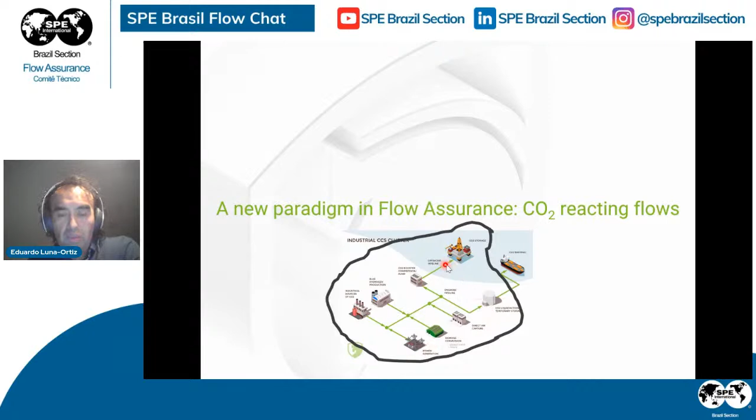And now to the topic. I have two particular topics. The first is CO2 as reacting flows. I'm going to talk about this part, which is when you transport or gather CO2 captured from various industrial sources, or from stripping CO2 from natural gas. That CO2 is gathered into gathering systems via pipelines, then sent to, for example, offshore sequestration, but also can be onshore. I'll talk a bit about this section with the pipelines.

Because there are many sources, we essentially won't just have CO2 - it's never going to be pure, so it will have a number of impurities, and it can literally be anything. Of course it can be water, a product of combustion. It can be hydrogen or nitrogen. It can be hydrocarbons, NOx, SOx, or anything. It's unbelievable the amount of stuff that can be there.

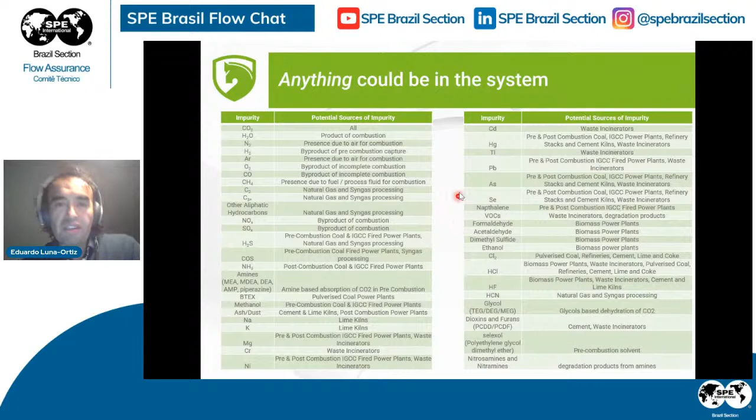And we know that even impurities at the ppm level - parts per million mole per mole - can change quite a lot the physical behavior of pure CO2. For example, here I have two figures from this reference. To the left, I have a fluid with CO2 with some impurities, including about 2.5 parts per million of glycol. This glycol induces liquid dropout at these pressures and temperatures, which are normally the operating pressures and temperatures of transport systems. If we have the same cocktail without the glycol, suddenly we don't have this liquid dropout - or we have it but at much lower temperatures. This is just due to having very little glycol in the system.

On the other hand, if we have 2% hydrogen, or 2% of other non-condensable impurities, this will enlarge the phase envelope, depending on the impurity of course. The problem is that if you want to operate within your pressure and temperature operating region, you might have to operate at higher pressures depending on the amount of, for example, hydrogen. So it's important to know it's not just pure CO2 that you have - you have various impurities, and every impurity or combination of impurities causes different behavior in the pure CO2.

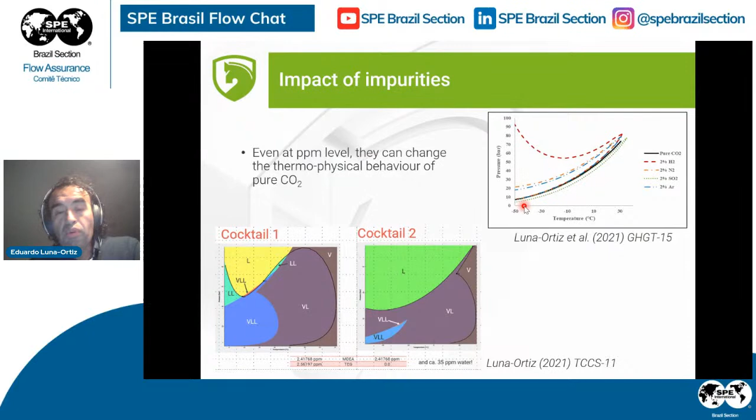Until very recently, we always assumed that whatever fluid we had in the pipelines would be in chemical equilibrium. That means whatever we had at the inlet is a non-reactive mixture, or the reactions already happened. I know that corrosion is essentially electrochemical reactions, but I'm not necessarily referring to those.

We know now that there are chemical reactions between the impurities in the system, but also with the CO2. That may be a problem because it might create undesirable products not present in the mixture at the inlet, but also may increase the concentration of other impurities, which might then trigger new reactions.

This is not necessarily new. IFE, a research institute in Norway, has been working on these topics for maybe 10 years, mostly from the experimental side. But as far as I know, they have only focused on reactions that create strong acids.

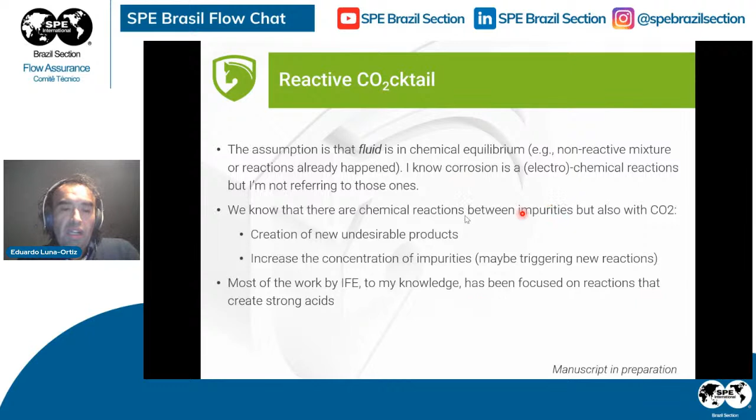We are preparing a manuscript regarding various chemical reactions. For example, if we have ammonia and CO2, or ammonia and SOx, we can create ammonium salts, ammonia and H2S, or ammonia and NOx. We can create other salts like ammonium nitrates. NOx and water can create strong acids like sulfuric acid and nitric acid.

And of course, this is not really good news. But also we can create perhaps solid sulfur. This is a picture of the creation of, I think, nitric acid.

This is an experiment carried out by IFE at these conditions and with these compositions, and they saw this nitric acid appearing, and over time it started eating the metal. So anyway, particularly these reactions with strong acids, they have detected in the laboratory, so we know that they occur.

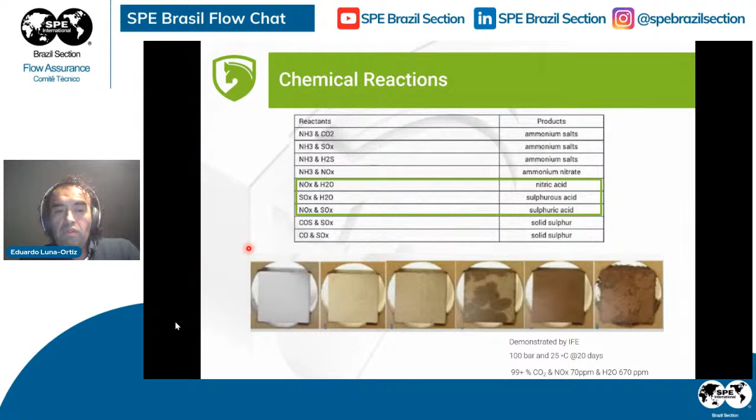So I think that chemical reactions are, in a way, unavoidable, unless we purify the CO2 to 100%, which might not be impossible, but would be very expensive. Or we take a risk-based approach, meaning we control the quality and purity of that CO2 via fluid specification, and then manage whatever products of those chemical reactions during operations.

However, I think we need to assume that the pipeline is effectively a long tubular reactor. And that means, I think, a new paradigm for the flow assurance engineer, because now we are going to have to start looking into different terms, which perhaps for a chemical engineer are more familiar.

For example, the extent of reaction, meaning how far a reaction has proceeded. Conversion is how much product is being formed in the system. But also there are other mass transfer mechanisms, for example diffusion, mixing, and turbulence that are going to be important, because depending on those mechanisms, you can enhance the reaction.

But of course, we also need to know the kinetics and the chemical mechanisms of the many reactions, because we will most likely have dozens of reactions happening simultaneously in that pipeline.

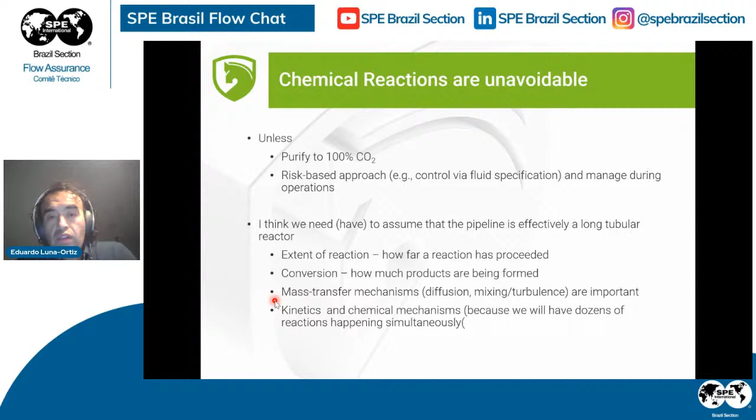I'm not the first one to come up with this. There is a group in Germany which has already started looking into this. They simulated these chemical reactions in a long pipeline, looking mostly at acid formation reactions, and what they reported is a simple hydraulic model.

There are no mass transfer mechanisms involved, so no diffusion or convective mixing. They have some kinetic data, extrapolated from literature data, which is coming mostly from combustion.

And these are the results they have in terms of the products coming out at the outlet of that pipeline. For example, they don't have nitric acid at the inlet, but at the outlet they have this amount of nitric acid coming out. There is a consumption of some impurities, for example SO3 that is being consumed, NOx that is being consumed, and so on and so forth.

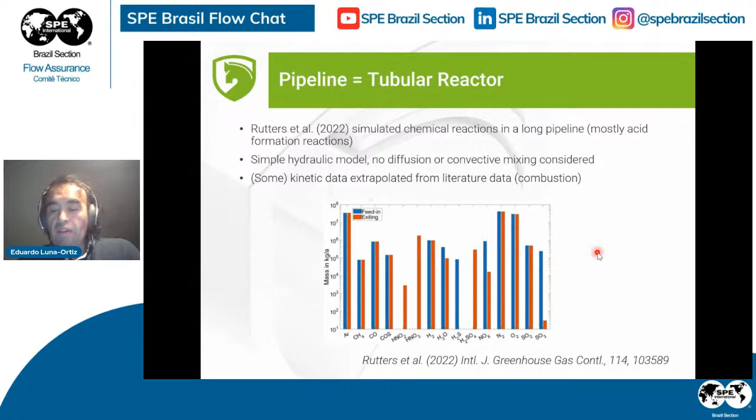So again, this is something that they investigated from the numerical point of view, and that is fine. And then what I thought is that I'm going to take it a little bit further, because if it's actually a chemical reaction, we need to consider so many mass transfer phenomena.

So then I used a relatively simple chemical reactor model, which is in the references, and X1 is the composition. First of all, I consider that this follows a general reaction, with reactant A and CO2, and it's a reversible reaction against B.

The reaction shifts to the right because of Le Chatelier's principle, because there's a lot of CO2. So CO2 is essentially the medium, so the reaction shifts to the production of product B. This model considers diffusion, some axial dispersion, and also that the system is non-isothermal, so there is heat transfer between the ambient and the reactor or the pipeline.

It's a dimensionless model, and there are various key dimensionless numbers, but the main one is the Damkohler number. This number is the ratio of the residence time to the reaction time. High values of this number indicate that the forward reaction is fast, and low values indicate that the reaction is kinetically controlled.

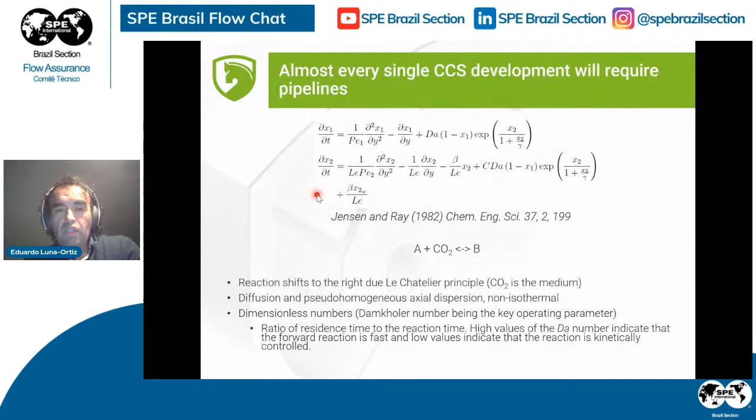And because it's quite a complex model—it's simple, but at the end it's quite complex—for this particular number, which is necessarily a relatively high number, not so high, we can detect some unstable behavior.

X1 is the conversion of product A along the reactor. Remember, it's along the pipeline, so it's a dimensionless pipeline from 0 to 1. This is the profile of that conversion.

What I predict here is that we actually have 3 different steady states: P1 and P3, which are the profiles. These are stable steady states, and P2 is the unstable steady state. Particularly for this P2, what I see is that at the exit of the pipeline we're going to have oscillations, which is called a Hopf instability. So I have oscillations of the conversion at the outlet of the reactor.

This is just to show that once we start modeling chemical reactions, we have a lot of transport and chemical phenomena that make the system even more complicated than our normal flow assurance models, which at the moment look at things without any chemical reactions. Anyway, I think unstable behavior is possible.

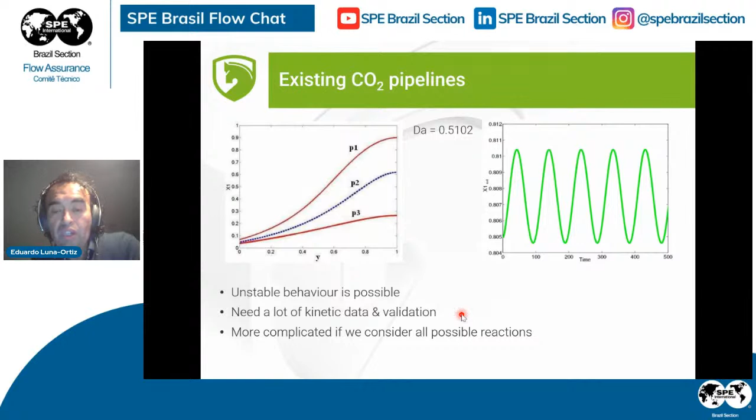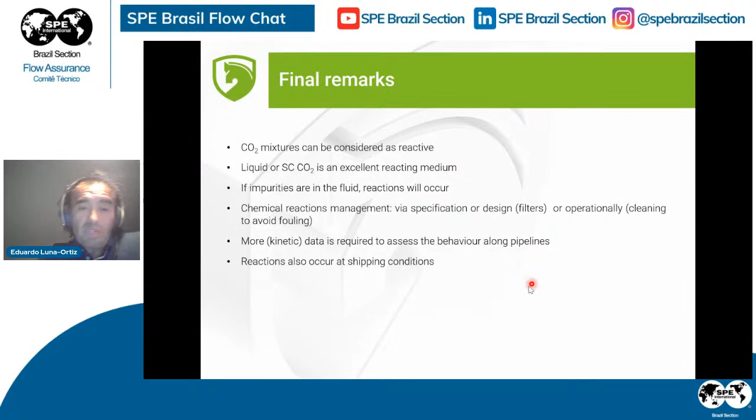Some remarks on this first topic: CO2 mixtures can be considered as reactive. Liquid or supercritical CO2 is going to be a reactive medium, and we can manage the reactions via specifications or, for example, by putting design filters, or operationally so we can clean to avoid fouling. Anyway, I think we still need a lot of kinetic data to assess the behavior along the pipelines. By the way, these reactions can also occur at shipping conditions.

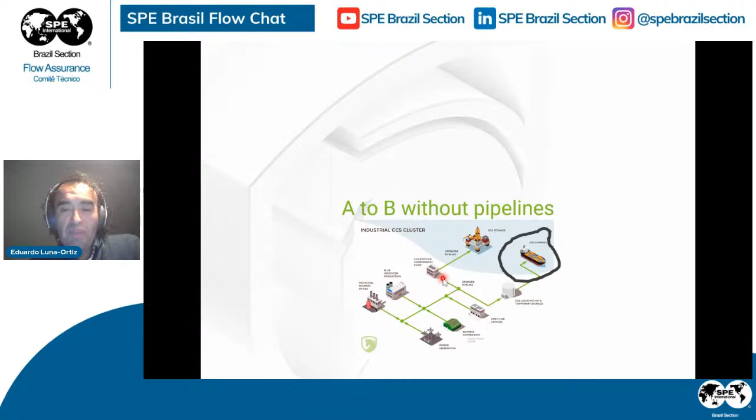And this leads me to my second topic, and I'm going to be as quick as I can. We know that we can transfer CO2 by pipelines, but the other way we can move CO2 around is via ships. Essentially there are two ways to do the shipping: one is port to port, from one port to another, and the second is port to direct injection, where we load up a ship here and send it to the CO2 storage, where we do the direct injection.

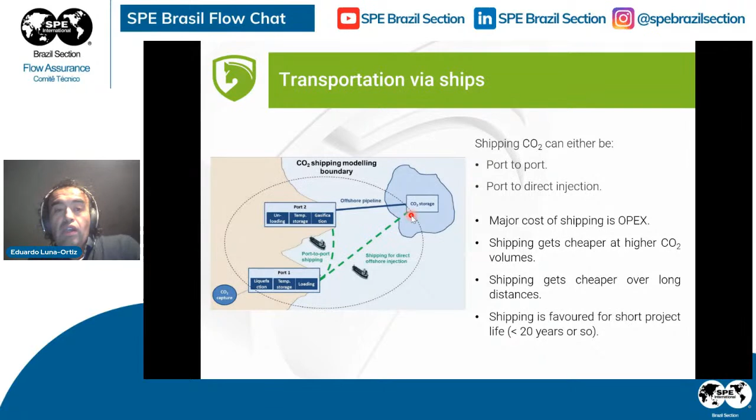We have essentially three conditions for shipping: low pressure, medium pressure, and high or elevated pressure. The temperature ranges from -50 degrees for low pressure to, let's say, ambient temperatures for high pressures. And the pressures vary from 5 bar to more than 45 bar.

For these shipping conditions, the lower the pressure, the bigger the ship, so we can load more CO2. At high pressure, we can load less CO2. Traditionally, especially one project, but many other projects looking at shipping CO2, are looking particularly at low pressure or even medium pressure. Why? Because if we look at the cost, particularly just the cost of the ship or the shipping, low and medium pressure shipping are cheaper than high pressure.

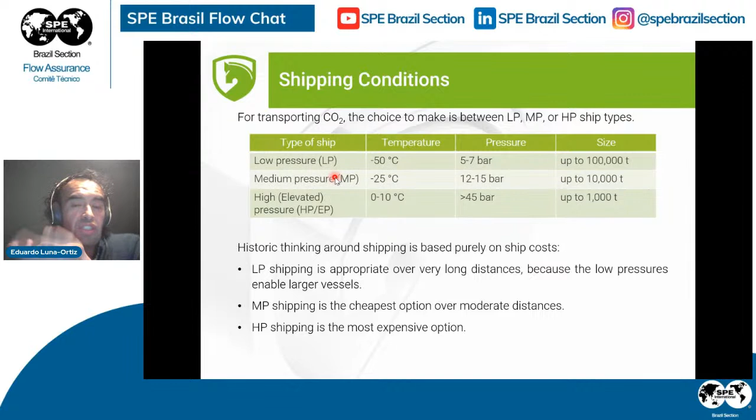However, we need to consider the full chain of cost, not just the shipping in isolation. This is because we're going to allow flexibility for the emitters and for the project operability, and this is subject to various constraints.

For example, some operational constraints are that the CO2 in the ships needs to be at bubble point based on fluid composition, to allow fluid expansion within the container. We might need compression and heating equipment for the CO2 prior to injection if we're going to do direct injection, which can be via an offloading system directly to the well or via a platform.

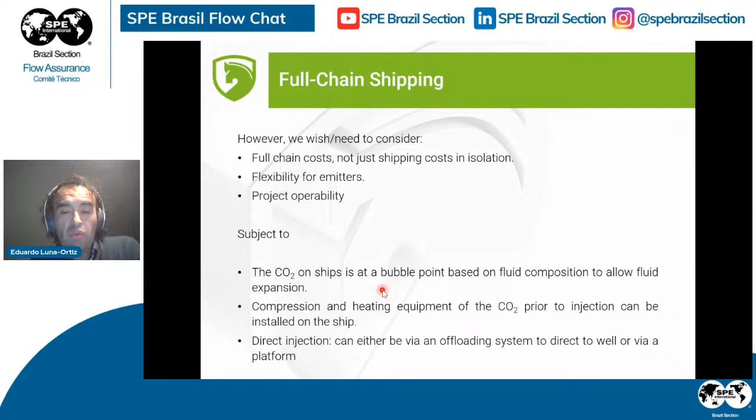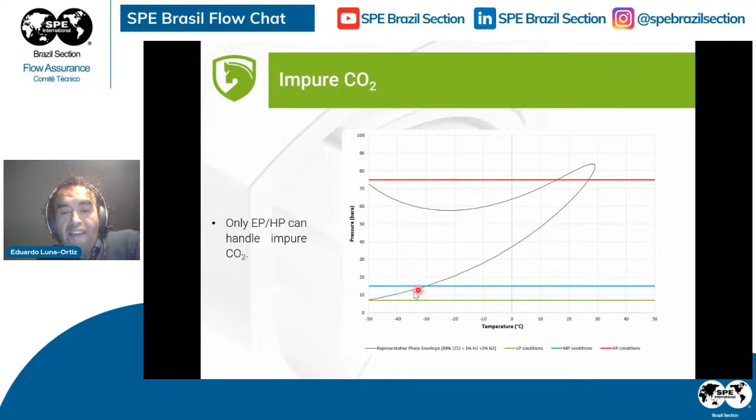Any shipping condition can handle pure CO2, but only elevated pressure or high pressure shipping can handle impure CO2. Here you can see that if we increase the impurities in the CO2, there's no bubble point for either low pressure or medium pressure.

If we compare shipping against pipeline, there is an enthalpy difference, an energy difference, between the shipping and pipeline conditions and the minimum temperature conditions we require when we want to inject at the injection well, which is normally around 0 degrees, particularly in the North Sea.

If we want to inject into a depleted reservoir, we're going to need probably between 8 to 12 megawatts of heating per million tons of CO2 for liquid CCS, for liquid pipelines or high pressure shipping. But if we want to do the same, inject into the depleted reservoir directly, but with low pressure or medium shipping, we need far more energy.

But if we're going to inject into a high pressure reservoir, so not a depleted reservoir but a saline aquifer for example, it might be possible that we don't even need heating at all. So less energy is usually required to get the CO2 into a high pressure reservoir compared to a low pressure reservoir.

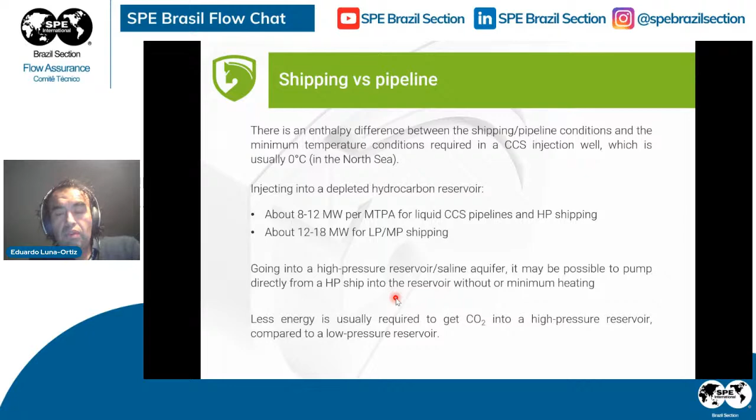But also pipelines and high pressure shipping can be a lot more flexible when handling the light ends, like hydrogen, nitrogen, or methane, which are the major impurities we consider.

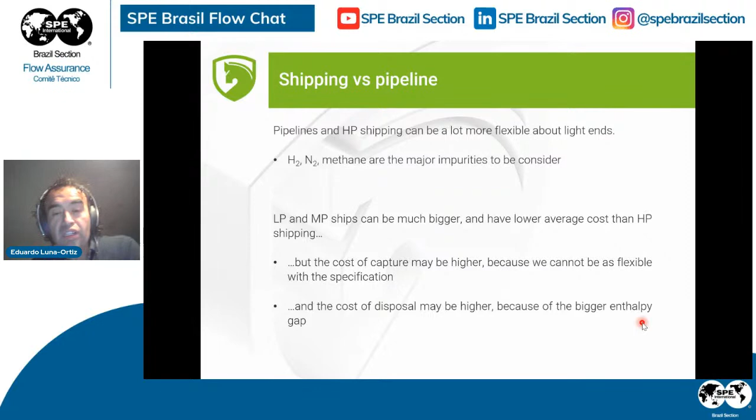Low pressure and medium pressure ships can be much bigger, as I said before, and they have lower average cost than high pressure shipping. But again, the cost of capture might be higher because we cannot be as flexible on the specification, since you need essentially pure CO2. And the cost of disposal might be higher because we need to heat more, particularly when injecting into depleted reservoirs. So there's a trade-off.

Actually, we might need two specifications for shipping projects. One is a pre-liquefaction spec, which essentially is going to be the specification we have for pipelines. And then we're going to require probably a post-liquefaction spec, which is required for medium pressure and low pressure shipping.

Also, it's important to know that once we have the liquefaction of the CO2, this creates an off-gas. And that gas is going to be made mostly of the light ends, so nitrogen, hydrogen, methane, whatever is lighter than CO2. And this off-gas composition will vary depending on the source of the CO2.

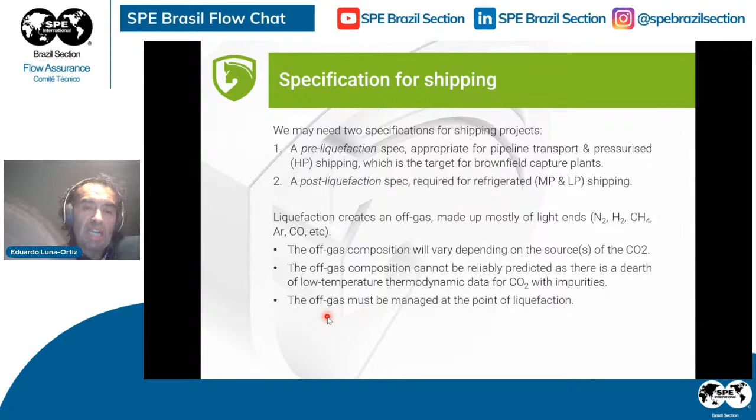The problem also from the thermodynamic point of view is that predicting this split or this phase behavior is going to be very difficult because there's not a lot of data at low temperature for these mixtures with impurities. And from the operational and design point of view, this off-gas must be managed at the point of liquefaction. So once you have that gas, we need to do something with it.

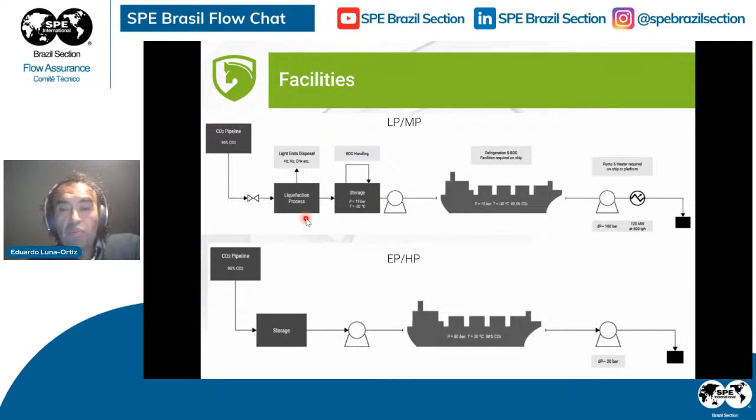This is just an example of how the two different facilities look between low pressure or medium pressure. They look more or less the same, and elevated pressure or high pressure. So essentially, when we have elevated or high pressure, we can get rid of the liquefaction process at port and have less heating, as I said.

Moreover, I think what is my current interest is that this becomes a supply chain optimization problem. So essentially, this is a mathematical problem in which we can define the tactical and operational plan of the ship trips, the loading and unloading, and the injection operations. It's going to become a combinatorial problem.

For example, we have 4 ports and 1 injection site, so which port goes first and how to move the CO2 from port to port, perhaps, if the ship routes are fixed or not. And of course we need to identify the optimal size of the ships, the number of ships required for each route, and the minimum storage required at port. So it's going to be a very interesting optimization problem.

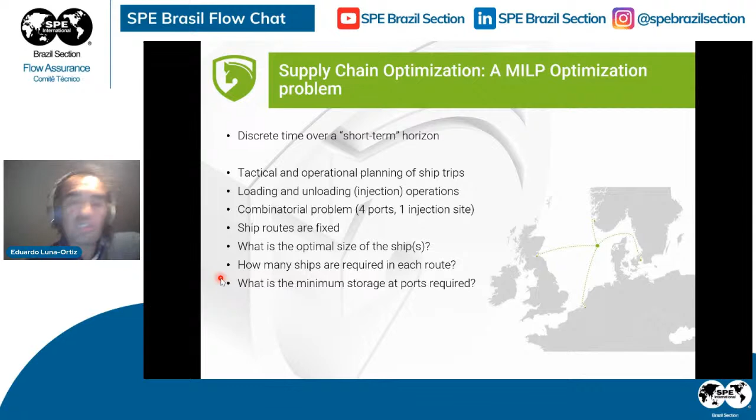My final remarks are that high pressure shipping can be a lot more flexible about light ends. Low pressure and medium pressure ships can be bigger but have lower average cost than high pressure shipping. But again, as I said, the cost might be higher for these various reasons.

The shipping conditions should be reviewed on a case-by-case basis, taking into consideration the full CCS chain—not only the shipping itself, but also the various emitters, the composition of this emitter, the distances from the emitters to the port to the injection site, and also the storage reservoir conditions, which might change over time.

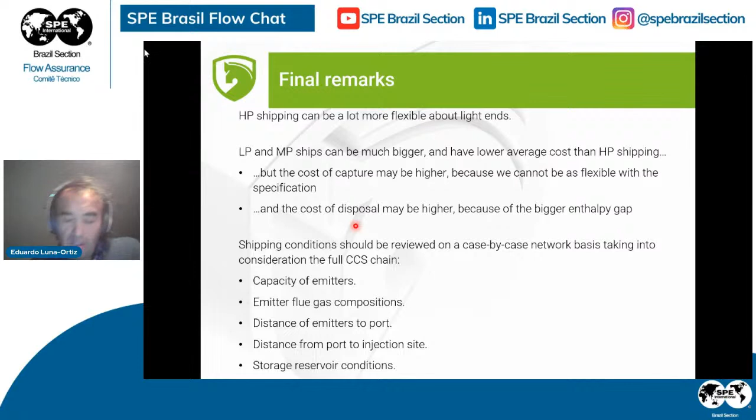And I think that's the end of my presentation. Thank you very much.

Hello, everyone. I think João was going to come in or not? Okay.

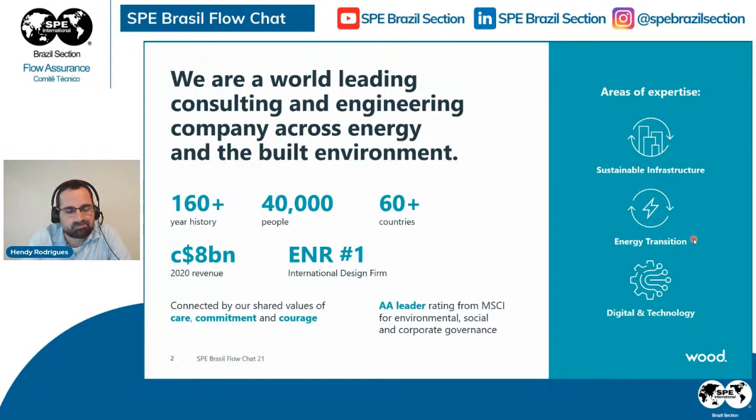So I'm going to start off by giving some introduction on Wood, which is the company I'm working for. It's not very well known in Brazil, but Wood is actually a leader in consulting and engineering worldwide. It has more than 160 years of history, more than 40,000 people worldwide, and operations in more than 60 countries, and we've been doing a lot of energy transition and engineering work there.

Specifically into the flow assurance side of things, Wood has been doing a lot of flow assurance work over the years. We have our energy and flow assurance group, so we do everything from concept selection all the way to decommissioning and everything in between. We do pre-feed, feed, project delivery—not only on the flow assurance side, but on the subsea equipment, pipelines, and now again entering the energy transition market.

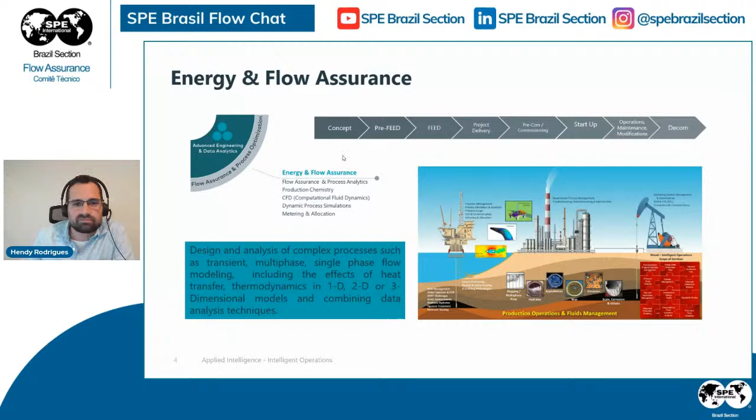Also, as I mentioned, entering the energy transition, we have been delivering solutions in every space on the energy transition, from CCS, solar, wind, hydrogen, and particularly on CCS we have more than 150 CCS studies going on, from concept to more evolved studies. So this is all to say that Wood has been well positioned in the energy transition space.

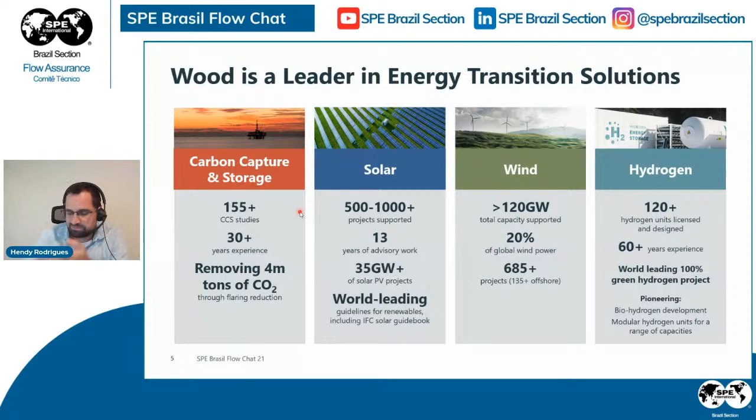And so what I'm trying to do in this presentation is to bring a view on how the flow assurance engineer and the work of flow assurance engineers can be translated into this new job that is being created, the CCS engineer. And it involves a lot of the things we are used to do. So I'm going to try to show you some of that.

Okay, but to start off, we have to look at CCS as a whole chain, right? It's not really economical to have one particular emitter of CO2 and one reservoir injection. So the industry has been thinking in hubs, right? We usually have CO2 collection hubs, and we can have CO2 from as many sources as possible. This CO2 will come to these collection hubs, and then it would be transported.

This transport can be made through ships or trucks or several different ways, but what we are going to deal with here is transport through pipelines, which whenever possible is the most economical. And of course, then we have the actual storage of this CO2, or usually injection in reservoirs, onshore and offshore. So I'll be focusing on the transportation part of it, okay?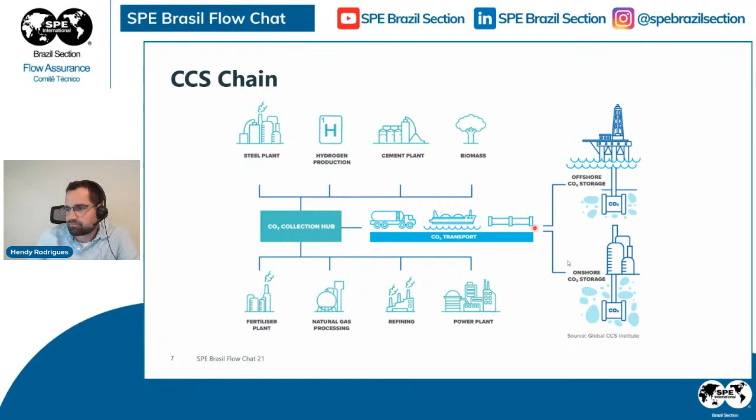So one way we like to think about CO2 transport, this picture kind of tells it. These hubs are most like garbage collection hubs, right? We have all these different emitters, different industries that tie into the system. And depending on their activity, the actual impurities and fluids they're connecting into the hub are different.

So it's just like garbage. One house has more of one type, another house has another type, but in the end everything is commingled. And not only that, but even one specific emitter can be changing its composition over time. So the impurities I have now may not be the same I will have tomorrow. We have huge fluctuations in composition, and that's one of the main issues we're going to see in the next few slides.

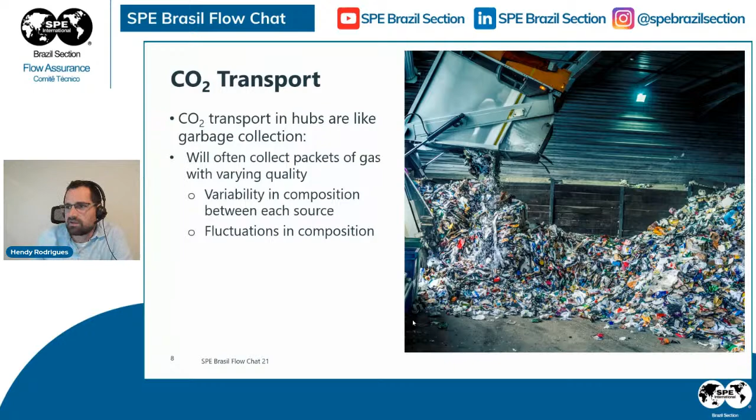To summarize, what are the main transportation and storage challenges for CO2 transport? One of the main questions we have to answer is, can we repurpose existing pipelines, or do we have to build new pipelines? That's a very hard decision to make, and it involves a lot of the studies that we as flow assurance engineers will be doing. So some of our calculations will result in the selection of what kind of system we want.

But let me highlight some of the key challenges here. For flow assurance, we have fluid specification, as I mentioned. We will get into the thermohydraulic behavior and how to actually get a good calculation of all the parameters we need. And with that comes the lack of reliable data and accurate models to get the answers we need. We also will have challenges on material selection, and we have to deal with fracture control in these pipelines.

And also looking to well integrity. It's not always possible to build new wells, so sometimes we want to reuse old wells. It all goes into, can we use existing infrastructure or not? And then there are some operation and monitoring challenges.

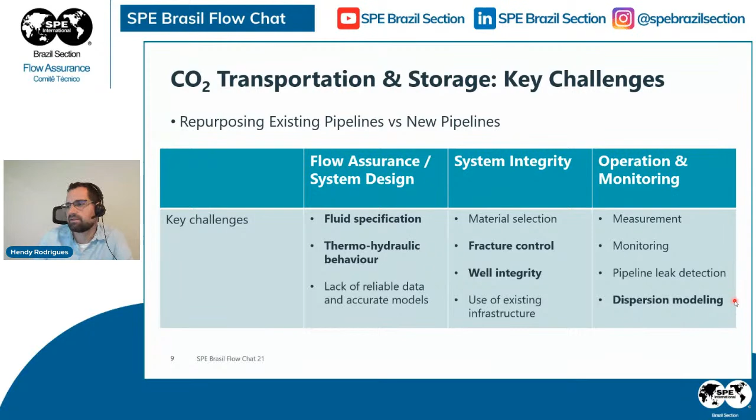So starting off, the first section is how can the flow assurance engineer become a CCS engineer? What's kind of the position and what kind of things we will be doing in this industry? First of all, let's look into the scenarios.

I have a chart here that shows pressure and temperature, and this is just for CO2. I'm trying to show where we are on this diagram. So we may start at low pressures and average temperatures. We're going to need to compress this CO2, so we go through a set of compressors to pressure up. But then we're going to transport it, in this case showing the transporting within the dense phase. And then we're going to storage at a much higher pressure. So we're going to be dealing in a wide range of pressure and temperature, and it's really hard to have an appropriate model that can perform well over this whole range.

We will be dealing with gas phase, with dense phase, with liquid phase. So that's the challenge. But in the end, we, as flow assurance engineers, will be dealing with pipeline flow, which is something we've been doing for quite some time.

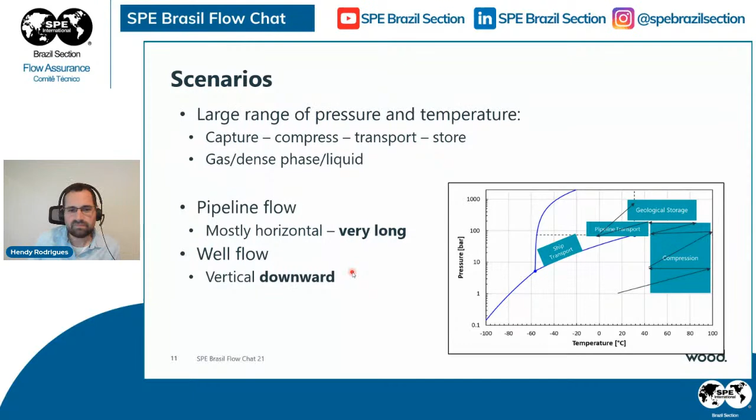The main difference here is, we have mostly horizontal flow, especially on these CO2 hubs, and with all this pipeline network, we're going to have very long pipelines. We're talking about hundreds of kilometers of pipelines. And we have well flow, but now we're looking into downward flow. Typically on oil and gas, we want to have upward flow. Now we have the other way around.

But in the end, I would say the single greatest challenge for us would be the fluid specification. As Eduardo mentioned before, I'm showing here a pressure and temperature chart, but now comparing different compositions. We can see that single or pure CO2 will have a straight line here, but if we start adding impurities, this phase envelope will be changing a lot. And the issue is that even small amounts of impurities will have a great impact on the phase envelope.

So we can quickly see the changes on the vapor-liquid equilibrium. There's this wider region here, depending on the actual impurities you have. But also there are huge differences in the actual properties.

That's what also affects our calculations. Think of density, for example. Especially when we are in the dense phase and near the critical point, the density varies a lot. And density really can affect one thing we want to have less uncertainty on.

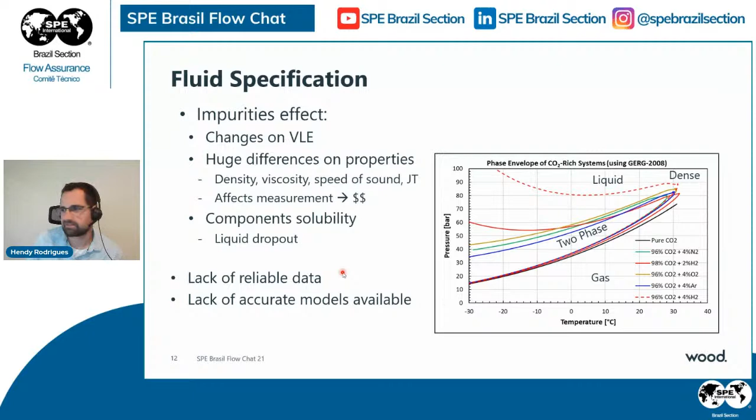So as a flow assurance engineer, we have to select an appropriate equation of state for that. In many cases, this equation of state can and will be different depending on your application. Depending on the project, depending on the impurities you expect to have, depending on what kind of analysis you want to do, you might be changing between different equations of state.

We also have to always be checking updated experiments and new field data where we can go back and check those equations of state. And keep in mind that PVT software is evolving constantly, so newer versions are always changing their basis of calculations, especially for these CCS related calculations. We've got to be checking new versions and comparing them to our benchmarks.

Now, going to the thermo-hydraulic modeling, coming from oil and gas, we kind of have done a lot of that. So basically, we're going to be doing fluid flow simulations. That's what we've been doing offshore and onshore, and we will be dealing in most cases with single phase flow if we select to have these CCS systems in either dense phase or gas phase.

We mostly will be dealing in single phase flow during steady state. However, we will be running a lot of transient simulations, especially special cases like shutdowns and blowdowns. Shutdown is something that will happen eventually when you have a running system. We cannot have 100% reliability, so every once in a while you're going to have a shutdown.

And we want to know how these fluids inside the pipeline will react to these shutdowns. And of course, blowdowns, the same thing. Sometimes we have to blow down a pipeline, or even if it's not programmed, blow down a leak or something. We will be doing simulations on that.

And the key issue for these transient simulations is the phase change. Since all these fluids are complex fluids and their vapor-liquid equilibrium is more complex, the phase change can be challenging.

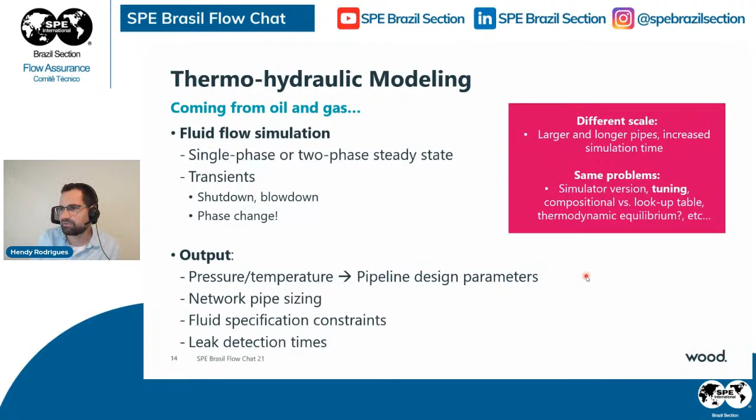Another thing that always comes up in a project is whether we're going to flow this CO2 in the dense phase or in the gas phase. That's a decision for the project. There's no right answer, but there are some key points we should look into.

First of all, flowing volumes. If we're in the gas phase, densities are much lower, so we'll have much more volume, and most likely our pipe sizes and diameters will be larger. However, if we're in the dense phase, we'll be operating at larger pressures, which will impact material selection and pipe thickness.

We also have to think about pumping versus compressing fluids. On these big networks, we'll have points where we have to increase pressure. There's also risk management - if we have a blowdown, the actual mass of CO2 leaking would be different if you're in gas, low pressure, or dense phase. There are also regulatory issues which vary country by country.

And again, there's the composition to consider. Depending on how much water concentration you have, we could have liquid dropout more easily in the dense or the gas phase. And also hydrate formation - it's easier to form hydrates under some conditions than others, so we have to keep this in mind as well.

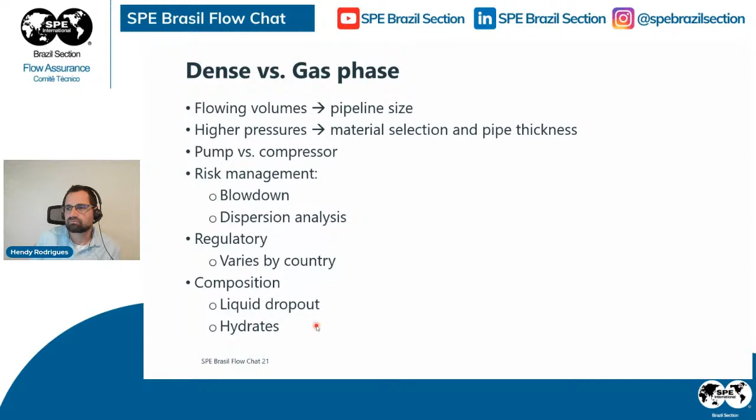So with that, I went through most of the core flow assurance issues we're going to be tackling. Now I just wanted to bring up some flow assurance related issues - not exactly flow assurance, but things we might deal with as engineers as well.

The first one is we might have injection challenges into the reservoir. Coming from oil and gas, we're used to having the reservoir where pressure goes down to enter the well and just flows up. Now we have the other way around - we're going to have a higher pressure inside the well and the reservoir at lower pressure. We're usually going to be dealing with depleted reservoirs which have lower pressure.

So one thing we have to keep in mind is JT cooling. Since CO2 has a larger Joule-Thomson coefficient, there's a potential for cooling of these fluids as they flow through the near wellbore part of the reservoir. So we can have hydrate concerns inside the reservoir as we flow from the well into the reservoir - pressure drops going down, temperatures going down.

And again, all of the impurities will have a role on that. So it's important to understand how the JT cooling effect will be changing based on the impurities.

We also need to always be mindful of the phase envelope. Depending on the pressure and temperatures we're going to operate at inside the well, we might have a two-phase split, and it becomes a very complex phenomena inside the well.

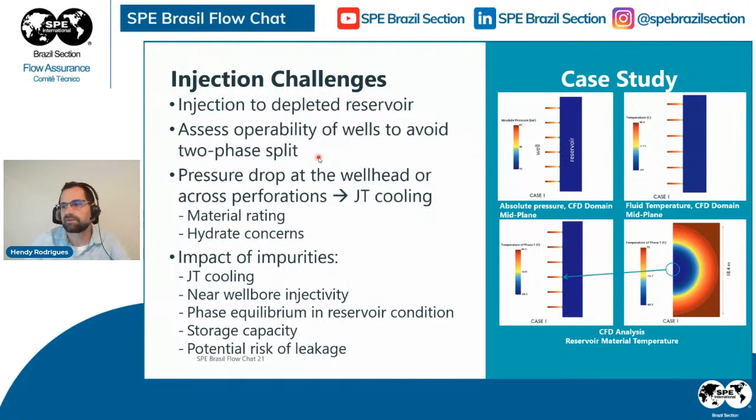So one thing we want is the speed of sound in the fluid to be higher than the actual fracture propagation rate, so that we lower the pressure before the fracture actually propagates. This will depend on the actual impurities and the fluid composition, and we may need experimental data on the actual composition of the fluid to check the speed of sound when doing a design.

We will have issues when we have a two-phase split, and there are some challenges here. If we have a situation where the speed of sound in the fluid becomes lower than the fracture propagation rate, we will see this fracture propagating.

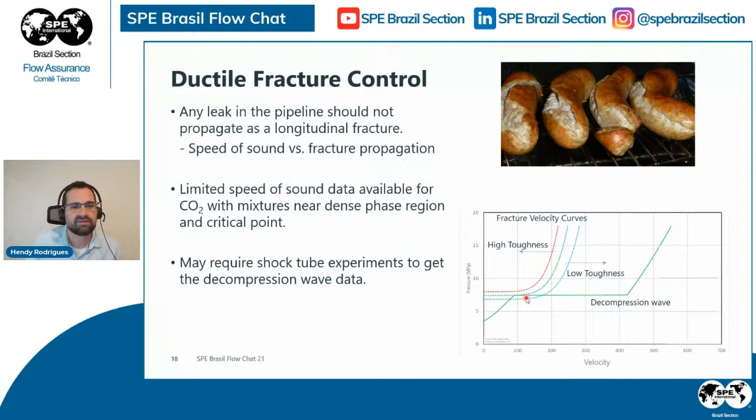Another thing is corrosion. We all understand that CO2 plus water is not a good combination. So depending on the fluid specification, we might need to increase our capex and opex to have better pipeline design. A key thing here is if we can prevent free water, that would be beneficial for the project. It goes back to the fluid specification and the equation of states we're using, trying to see if the amount of water from these emitters will pose a problem to the system.

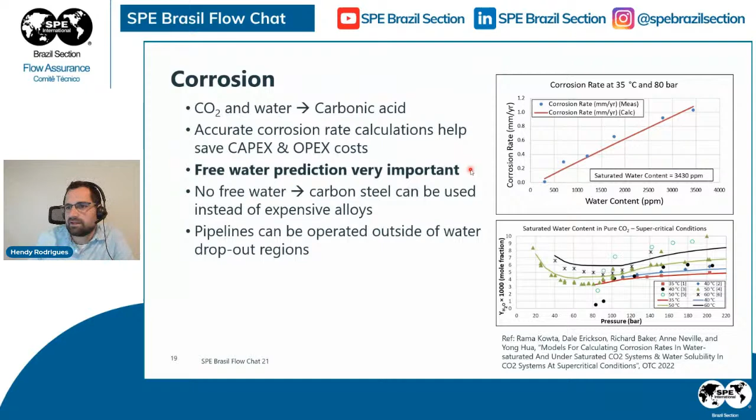The last example I'm showing here is the CO2 plume dispersion modeling. This is something we can do with CFD, which is part of our flow expertise. Whenever there's a leak, we need to know, based on the mass flow leaking and the position of the pipeline, how long it will take for this CO2 plume to reach highly populated areas and so on. We can do a lot of CFD and even more simplified models to assess this CO2 dispersion.

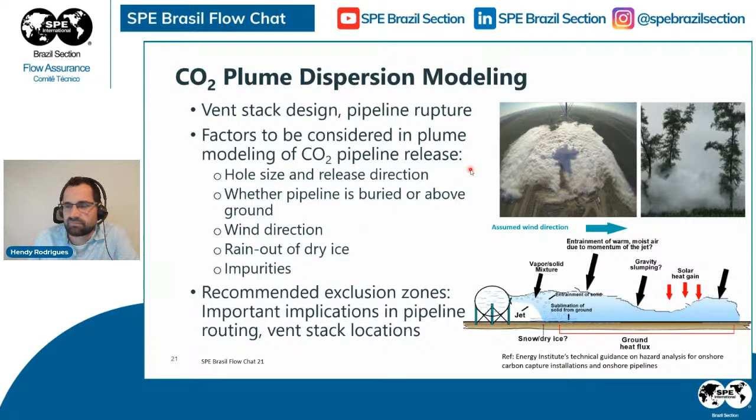So to conclude my talk, I'm bringing the key takeaways. As I mentioned before, fluid specification is the key challenge for us. It can vary a lot from emitter to emitter, from project to project. We've got to be able to correctly model these impurities in our equations of state and in our thermohydraulic simulation models in order to get accurate results for the project.

Some of the solutions that Wood has been working on: we participate in JIPs, Joint Industry Projects, where we've been studying different equations of state and different experimental data, and providing guidelines for the industry on how to deal with all these impurities. We have developed models to better calculate all these parameters, and we've been involved in several research and industry programs trying to make our models better.

On the system integrity side, we're going to be looking into material selection, fracture control, and well integrity. And on the operation side, again, measurement and monitoring. One solution that we've been providing the industry is real-time monitoring. We have our systems already implemented in big CCS projects, where we've been doing real-time monitoring of these CO2 pipelines.

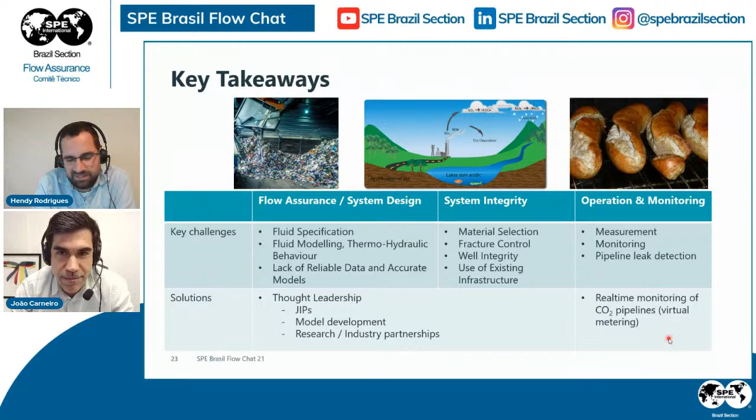With that, I end my presentation. I hope I could start this conversation on flow assurance for CCS in Brazil. I just wanted to add that Wood has been working on this in quite a few projects in Europe, US, and Canada, and we will be happy to bring this knowledge to Brazil and have the chance to talk with all the players in this market. Again, thank you for the opportunity.

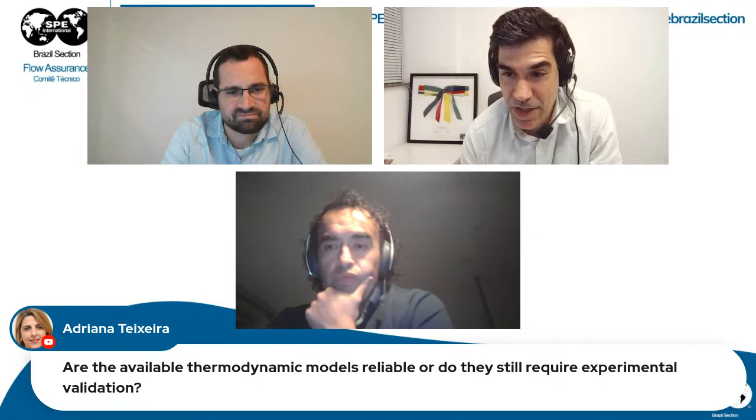So, another question by Adriana: are the available thermodynamic models reliable, or do they still require validation and further development? I think both of you have mentioned this, but if you can emphasize a bit more on that aspect.

Yeah, I think every equation of state might have more physics than others to model a particular mixture, but regardless of that, you still need to have some sort of validation and eventually do regression with experimental data. As we both have said, there isn't really a lot of experimental data to do this kind of validation. I think the models per se can be reliable. The thing is, when you add impurities, we don't actually have data for interaction between given components. So most of the experiments are either CO2 with methane or CO2 with hydrogen, binary mixtures. And we can all agree that you're never going to have an experiment that matches exactly what you have in your system, with the exact amounts, so it's always going to be a challenge. We're always going to need more data.

Yeah, that's okay, I think we are done with the questions.